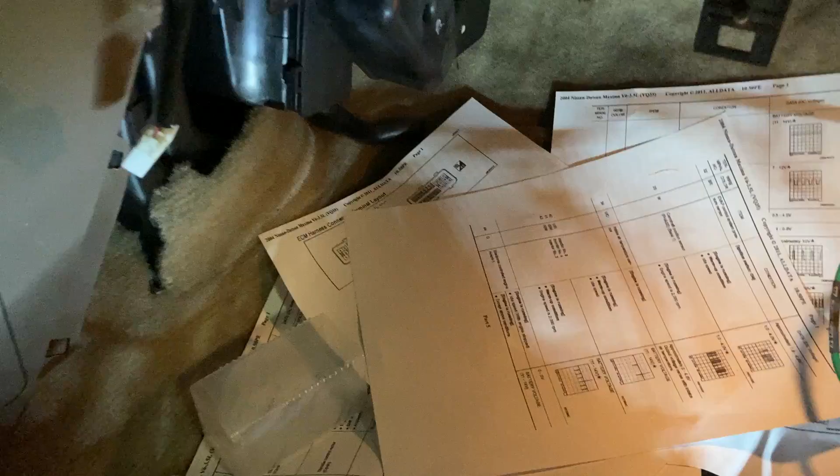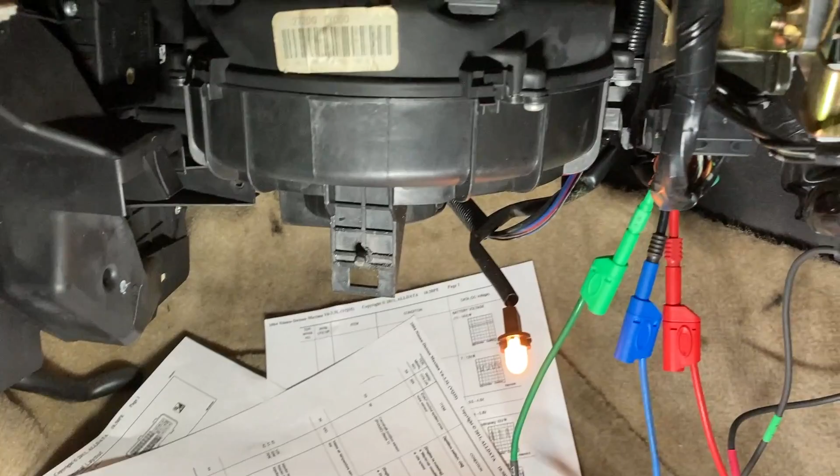I'm out here working on this Nissan again. Sorry I'm working on it at night, but my laptop died and I had to go buy a new one. And by the time I got back, got everything installed on the laptop and got back out here, it's dark. It's dark 30, so I got the glove box torn out here.

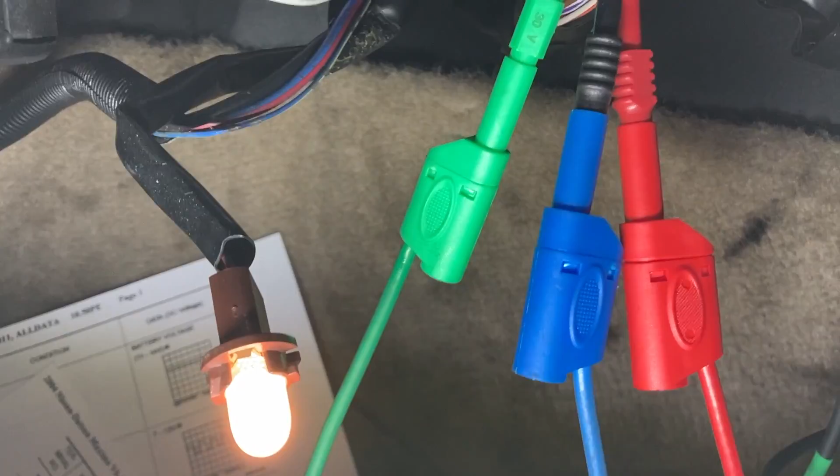And you get down here to the computer and you got to screw with that cover and get it off, and then get your probes in there. But basically my green probe is probed into the one that I think's bad. That's bank 2. The red probe is bank 1, and the blue probe is going to the crankshaft. So we're going to just scope all of these signals and see if they're all good or bad.

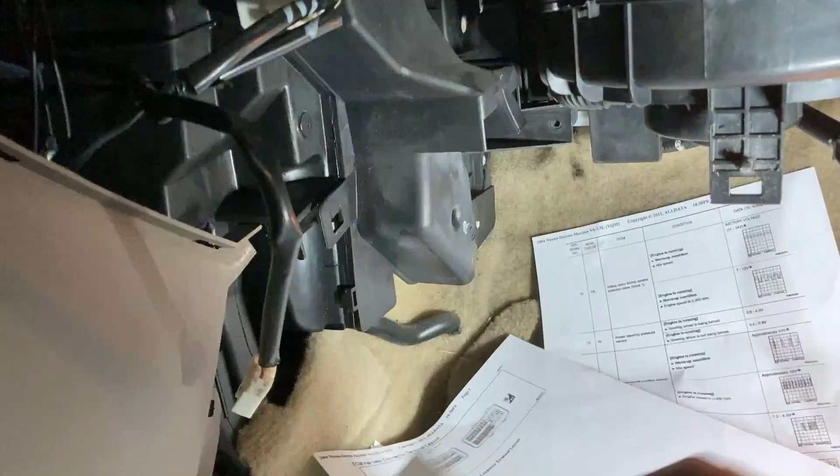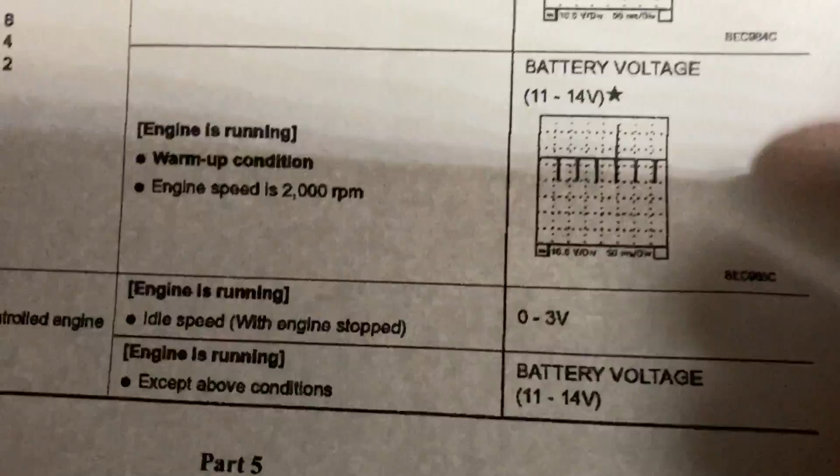Basically you have to look this up. I looked the connector diagram up in ALLDATA. It gives you the pinout. On Nissans, the pinouts are weird. They're kind of backwards. This is looking at it from the back of the connector, not from the front. So you have to keep that in mind. Nissan also gives you little mini scope diagrams as to what kind of signals you should expect to see, which is kind of helpful. But they're kind of so crappy that they don't matter.

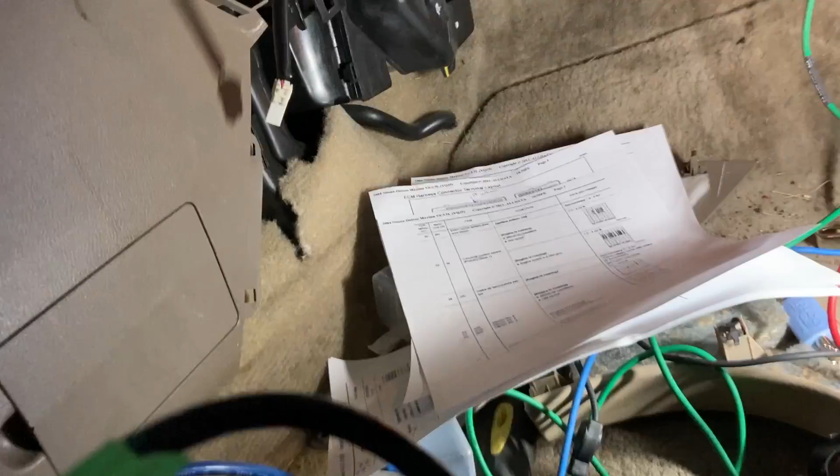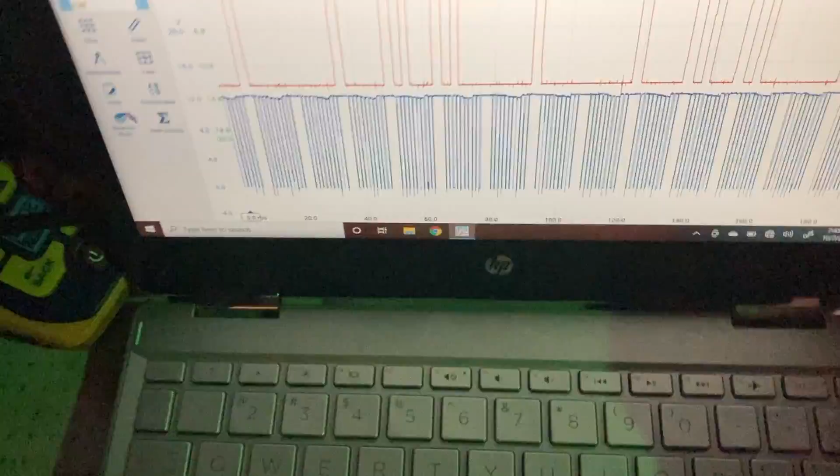So I'm hooked up. I've got this going, and we're gonna see if we see all 3 signals or we just see 2 signals. And we figure out where I put the keys. These are my keys. Oh, I got them in the ignition. And sure enough, here. Let me wipe off the screen.

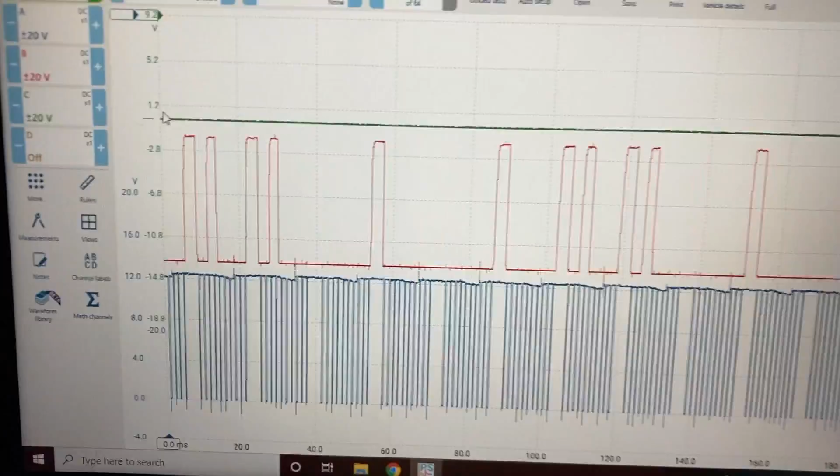Sure enough, we got a flat line on the green trace. We got a good looking red, and we got a good looking crank signal, but we have no green camshaft position signal coming into the computer. So that tells us that we've got a broken wire somewhere in that harness. So tomorrow we're going to slice open the harness and look for the break. But yep, that's what we're seeing.

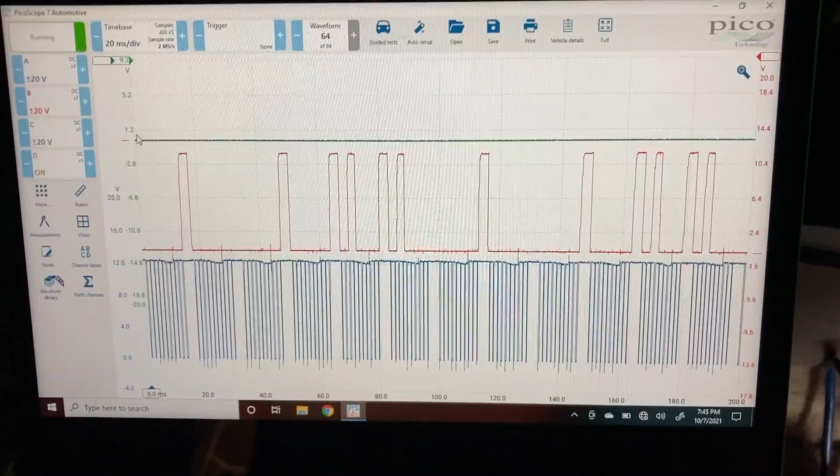All right, folks. So I just want to say, when you wonder why this costs so much to have a car diagnosed, right? You could have plugged in your fancy little scan tool and got a code and replaced the camshaft position sensor, and it would not have fixed the problem. The problem is a broken wire somewhere in the harness, and you're going to have to have a scope to read those signals. You don't have to have a Pico scope, but Picos are nice because they come with the waveform library, and they're just a nice scope.

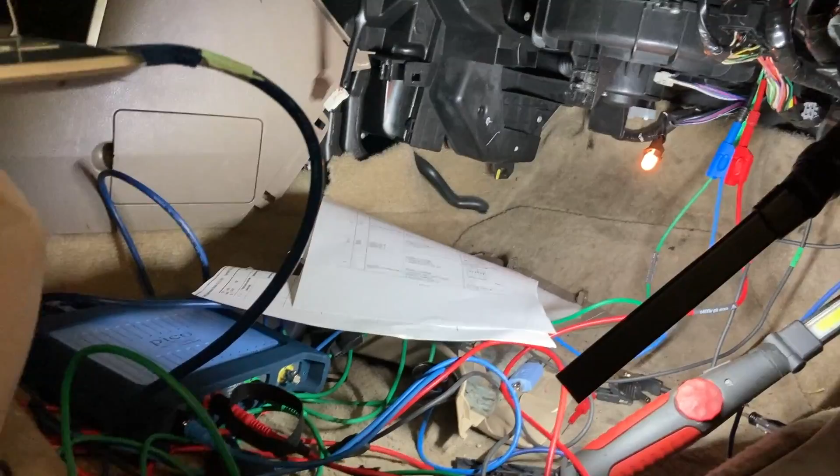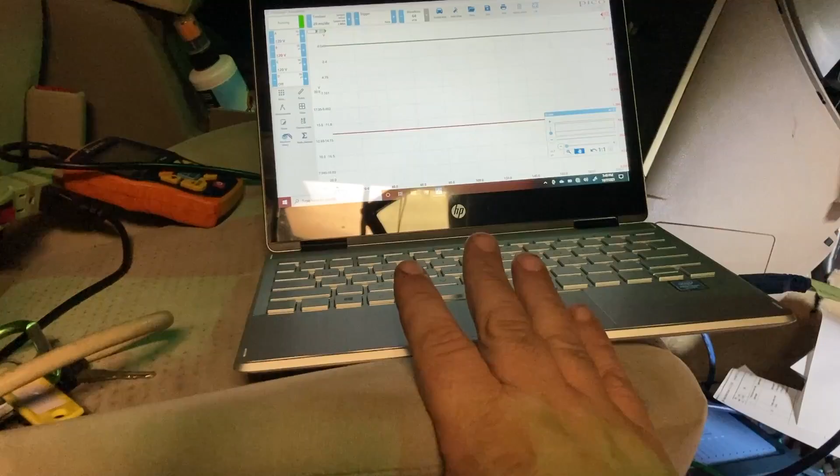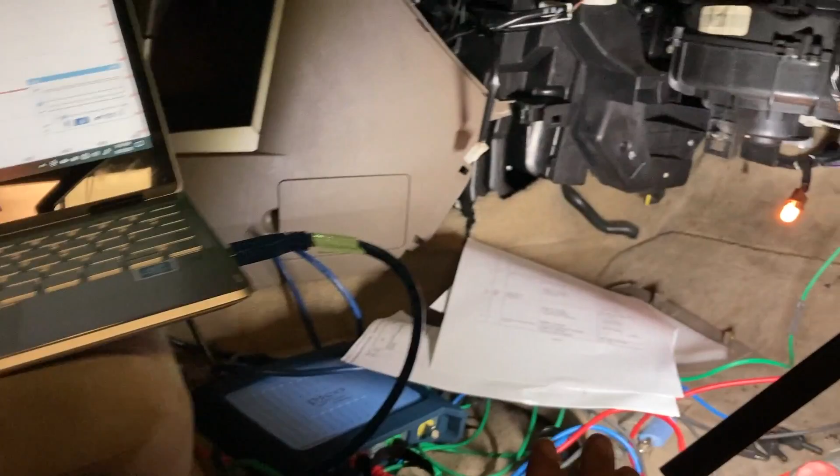But you got to have an $800 laptop, a $2,000 scope. You got to have all the probes and wires and accessories and everything that goes with it, and it takes time to set all this up, to go look up the information, pull the connector apart, find the wires, get them probed, get everything set up and going. And then I had to stop because my laptop died and go buy a new laptop and install the software on that, and it's a new version of the software, so I had to kind of learn the new version, which I really like. It just takes time. It takes a lot of work and a lot of expensive equipment.

And this is where your neighborhood crackhead pad slapper isn't going to be able to fix this problem. Even with this little scan tool, he's not going to be able to tell where it is. I mean, he might get lucky and find a broken wire somewhere, but now we have to go look for how many connectors and splices there are, and then we'll see if we can't break this harness apart in 2 and tell where our break is. But we're definitely not getting a signal to the computer, so we know we got a broken wire somewhere.

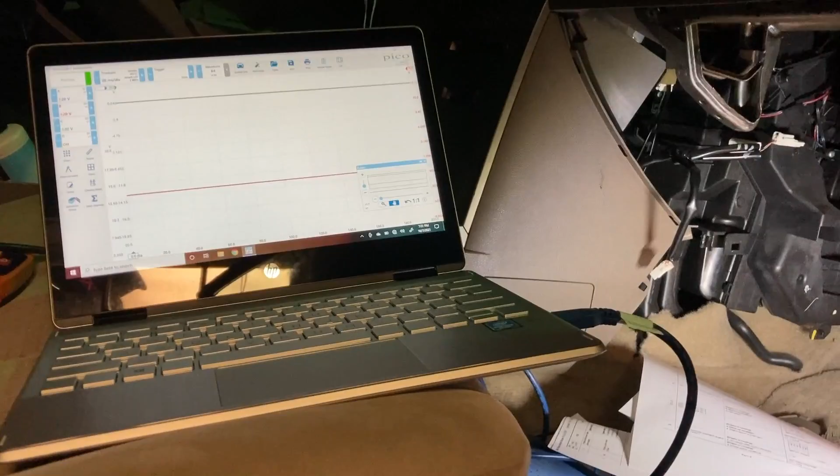So at the end of the day, the fix on this guy will be to patch a broken wire. The process of finding it took hours and lots of expensive equipment. So when somebody says, "Oh, I just fixed a broken wire," don't be surprised if the bill is $300-400. It is what it is, and that's what it takes to fix modern cars. And you can have a normal mechanic wrench on this thing all day long. He could be replacing fuel pumps and coil packs and all kinds of stuff, but nothing you're going to bolt on is going to fix this problem. It just takes the diagnostic time and the equipment to go through it.

And that's something that I have a little bit of a hard time getting people to understand, why they have to pay me so much. But if people don't want to pay me, they don't have to come to me. They can come to me after they paid somebody else to swap out multiple parts and still have a car that doesn't work. And you know, I'm not looking for more business. I'm really not. I got plenty.

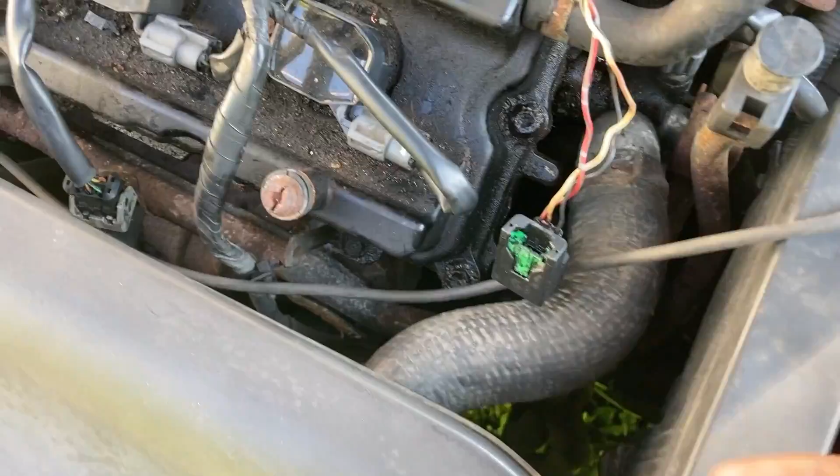All right, so here is the wiring all opened up.

Yeah, I'm going to have to, of course, tape this back shut. Here's the wire here and here. And so at first, I was not getting any connectivity through here. I wiggled the wire, I pulled on it, and now all of a sudden I'm getting connectivity and I can't get it to go away.

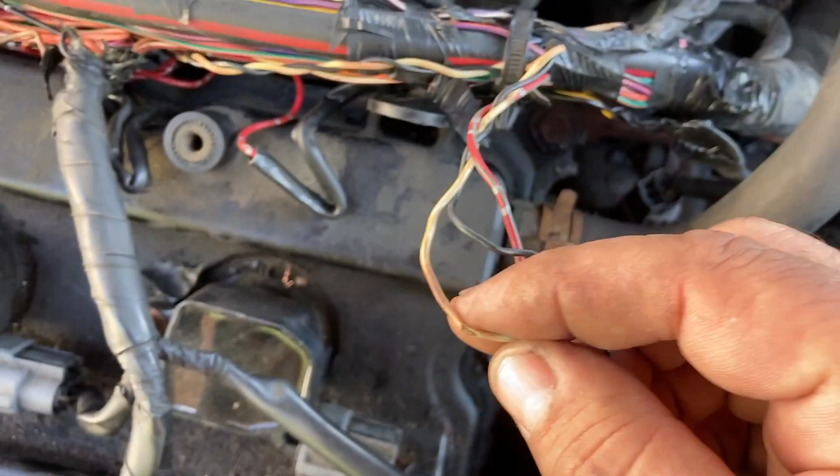I did notice there is a small nick in the wire right here. It appears that it's still making connection through there, but what I'm going to do is just replace this whole little piece of wire with some new wire, and then we'll solder it in there and heat shrink it, and then we'll see if we're getting signal to the computer now.

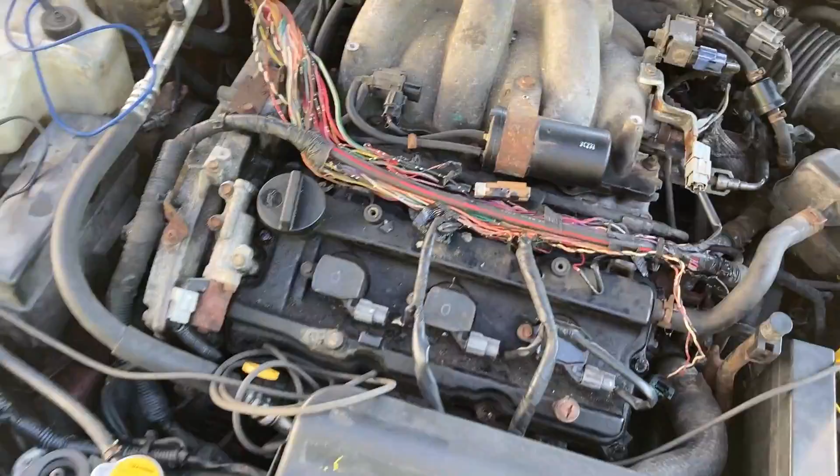But there definitely was a break somewhere in this wire, but I can't find actually where the break was, and I've tried pulling on it and it seems strong, but I wasn't getting connectivity at first, and now I am. So there's definitely something in this piece of wire, so we're gonna replace it, and then we'll see what we get.

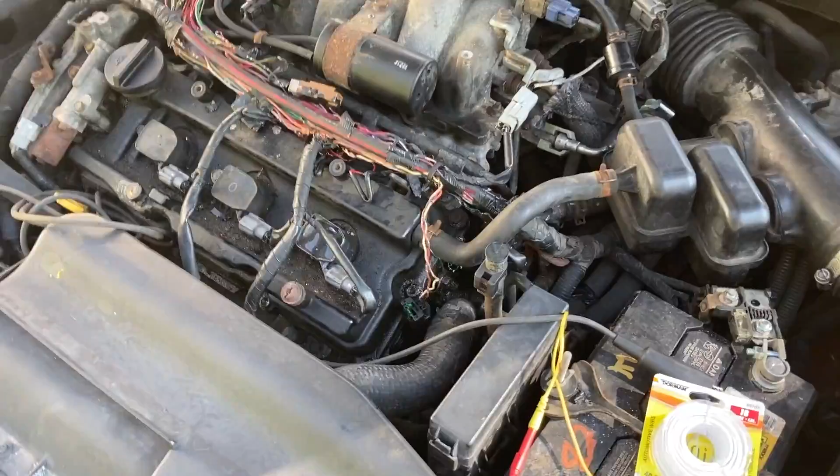Okay, so I've replaced the wire here, the white wire, and I rewrapped it around the black wire all the way back here through the harness, and ran it all the way back to here, and then tapped it in. I soldered it and heat shrunk it with some marine heat shrink. It's got the glue in it to keep it, you know, tight.

So that looks good. You want to wrap these around if they're wrapped around. I don't know on this specific one, but a lot of times the twists make a difference. They help eliminate noise and interference from the signal. And that's twisted around the ground, so that tells me that that could likely be the case.

So now I just gotta plug this back in and do a test, see if it's gonna work, and if I'm getting signal now, then I can tape this harness back up and kind of try to make it all neat again. You just have to cut it off a little bit at a time there, and it's kind of a pain to get into, but you got to do what you got to do. And then we'll be ready to tape this all back up and kind of put it all together, hopefully.

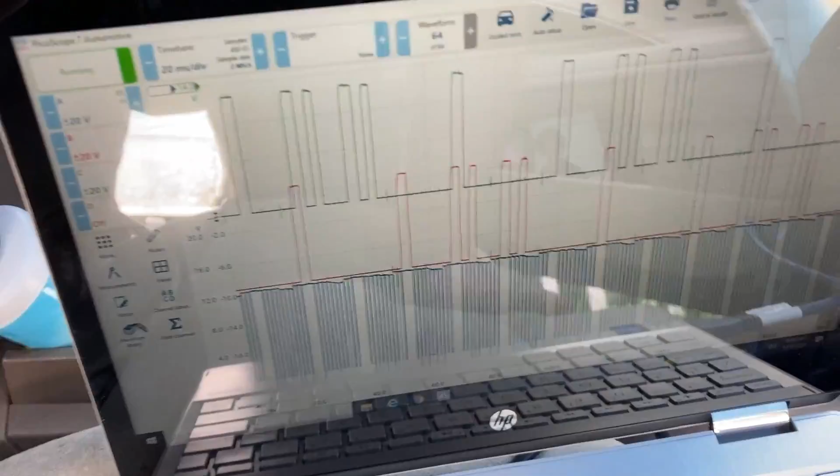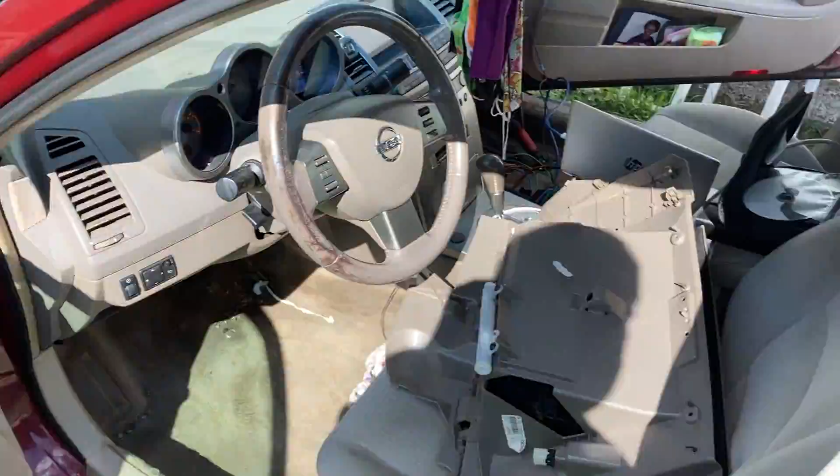All right, so I have all of my signals now, and the timing chain, when it first started, I heard it rattle just for a split second, and then it came right back into alignment. I'm gonna wait and see if the idle comes down. Let it warm up a little here. We'll let it warm up. It's idling a little high. It's about 1500 RPMs right now, but it's cold. It's probably relearning its idle too, because now it's got the signal.

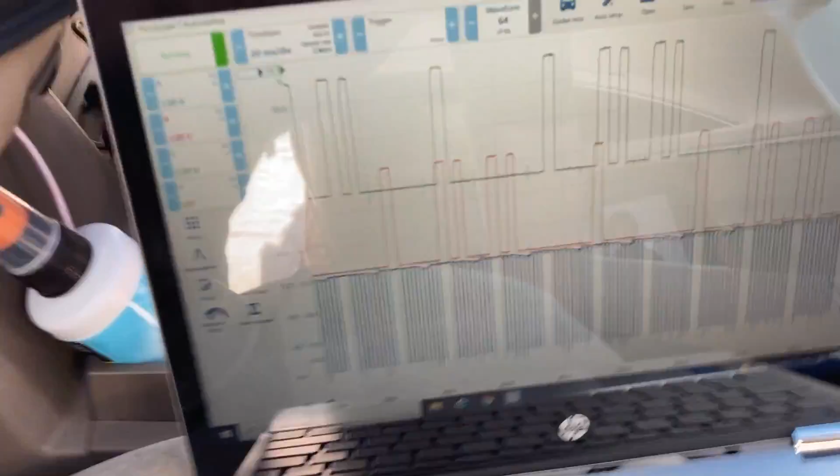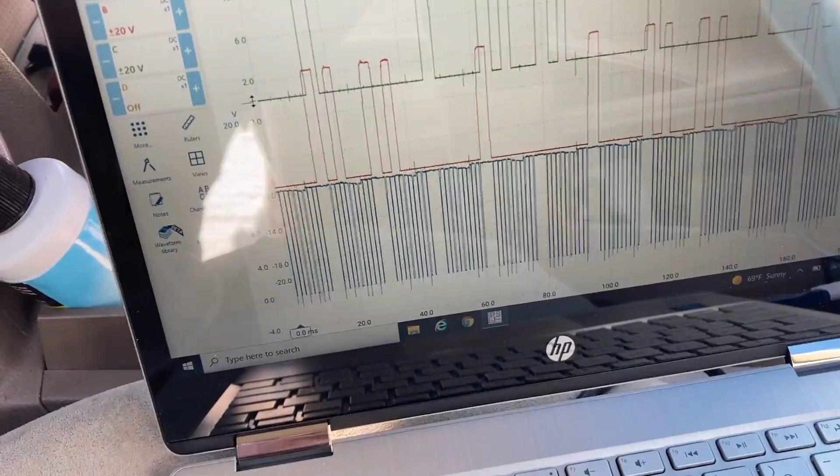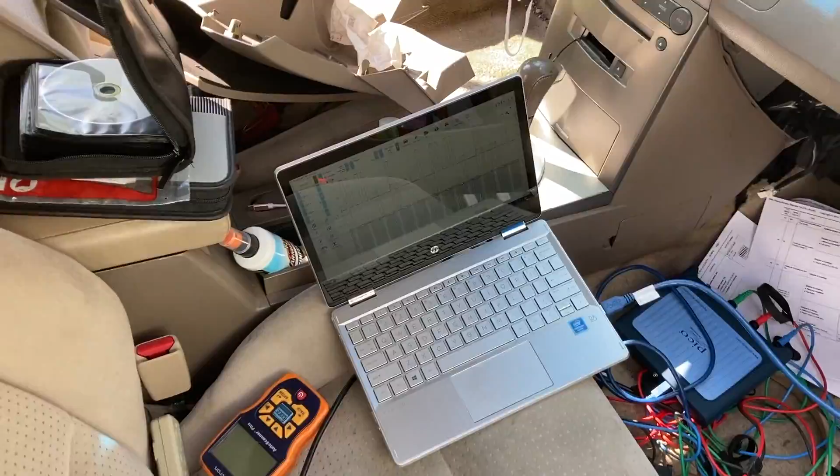But I have my green trace, my red trace, my crankshaft signal. Everything looks good. I'm happy with that. I'm gonna let her run for a minute. She needs to charge the battery up anyway. I had to put the battery maintainer on it and throw an extra 60 amps in her to get her to start.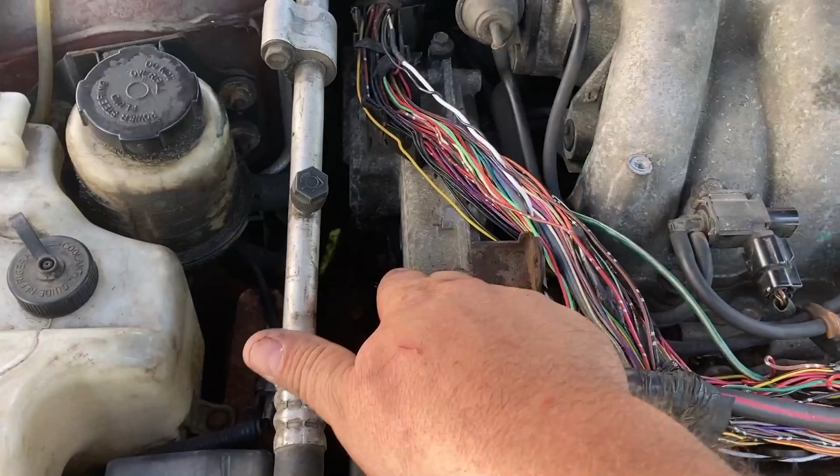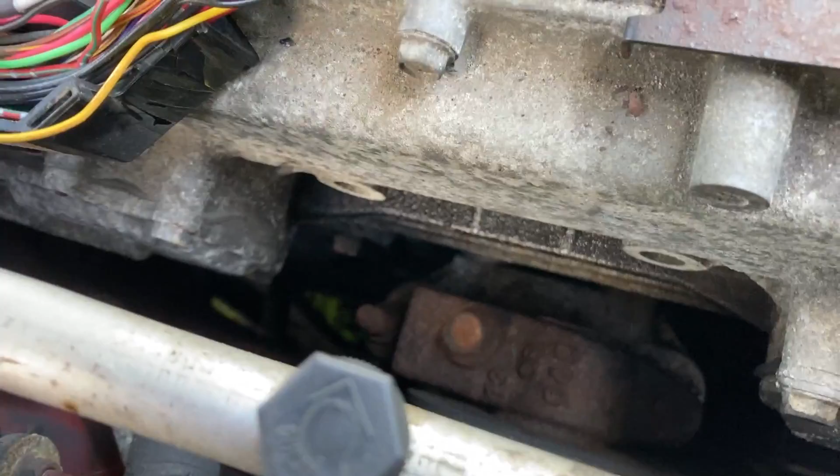She's still rattling a little. I think she needs a timing chain. Man, she don't sound good. Alright, I'm just going to let her run for a minute here and see what happens. Oh yeah, timing chain's making some noise now. What this is, one of the guides go bad in here. And you can't replace the guide. You gotta tear this whole timing cover off to get to it.

She's idling down now. Let's see what she's idling at. She's down below the 1,000. She's at 800 to 900. Still a little bit high, but not terrible. But that timing chain sounds pretty bad.

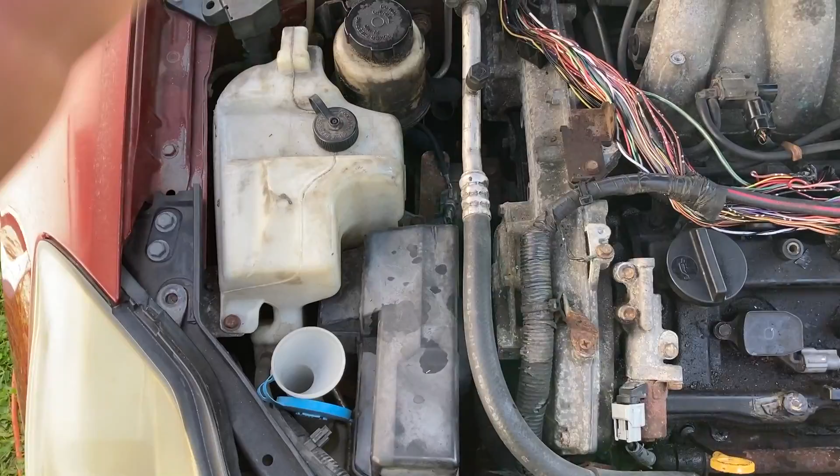Unfortunately, this thing's not worth putting the timing chain in. Darn it. I was hoping it was just the camshaft position sensor signal causing that phaser to be off. But it's definitely got a loose and rattling timing chain. Yeah, that sounds pretty bad. It's about to go.

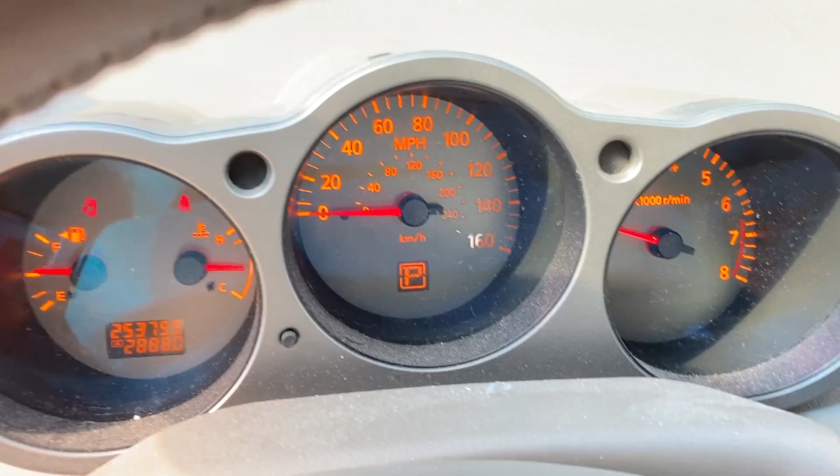Well, the check engine light just went out all on its own. And she's idling down just below 1,000. Still a tad bit high, but I don't know where this vehicle normally idles. She sounds good other than that timing chain. And that noise is coming right from the middle here, where that guide is.

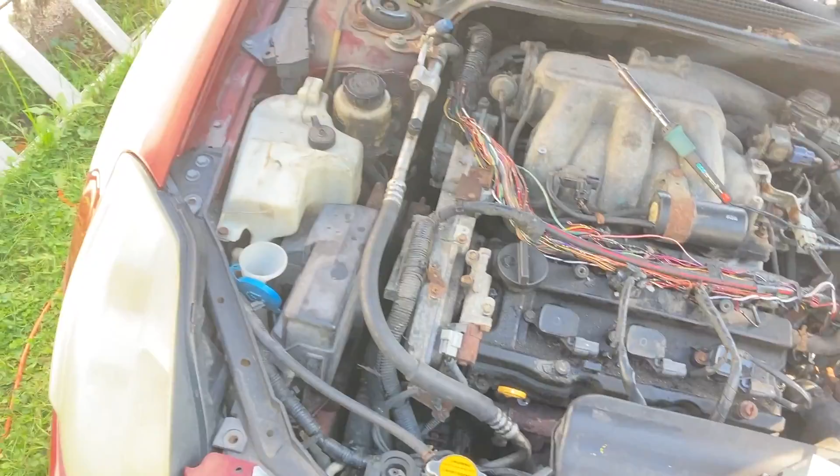So, or it could be a guide broken somewhere else and it's just got some slack in the chain. I think it's actually gotten worse because now it can adjust this cam phaser. I think that's making it a little worse. Well, shoot. I guess I better call the customer and give them the bad news.

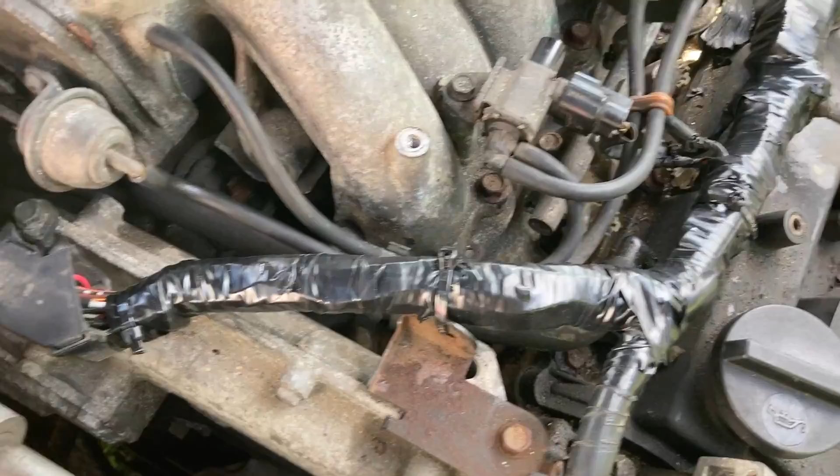Alright, I got the wiring harness all taped back up and put back in its spot. I don't know, most of you guys probably watch Eric O, but if you got to get down under these tight places with tape, you just put some tape on a socket and wrap it around. That way you don't have to try to fit this big giant roll under there every time. I learned that trick from Eric O. I think he learned it from somebody else, but it works really well.

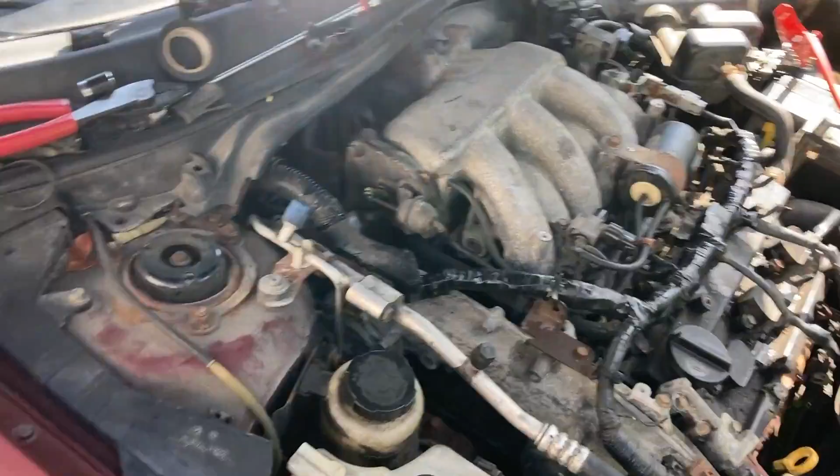It's a handy tip. So now I just got to put the inside back together, and this thing is ready to get out of here. And I'm on to the next one.